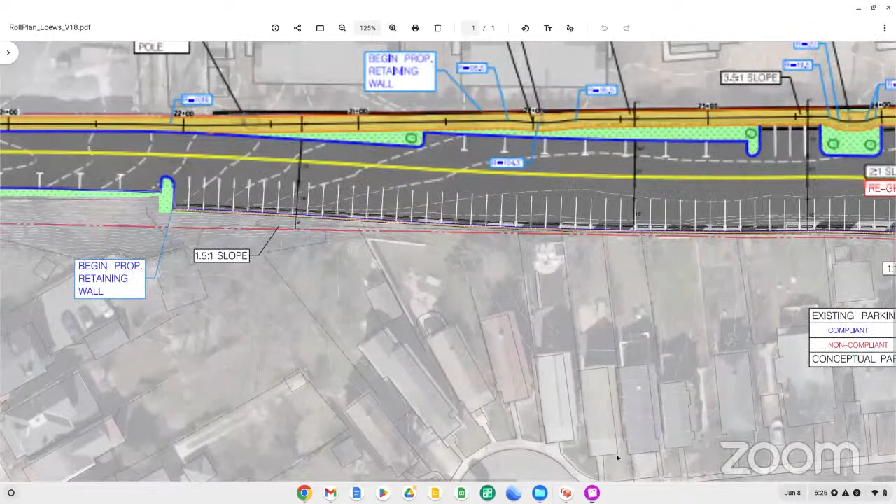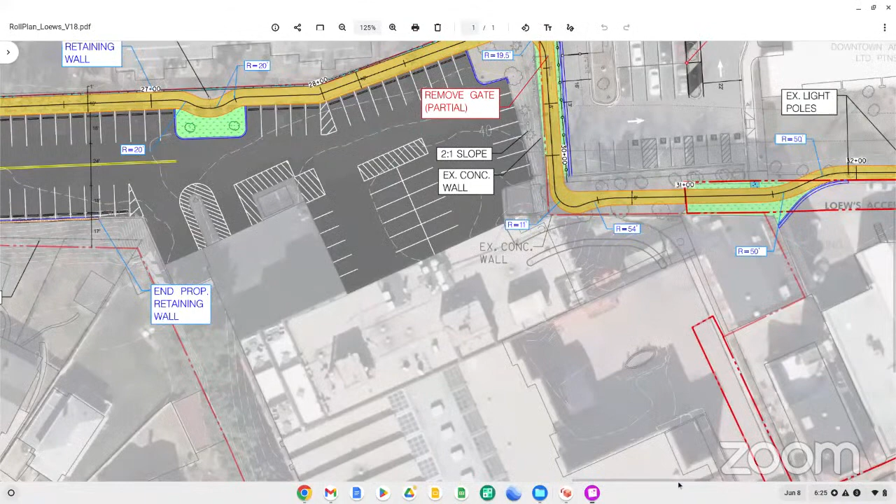Everyone, I am so sorry, this is Crystal, I have to cut out. My niece has a performance at Maryland Hall this evening, so I'm about to head out to partake in that event. Great, go enjoy yourself, thanks for coming, Crystal. Thank you, and thank you for inviting me, for including me. I'm really looking forward to see what we can do with this trail.

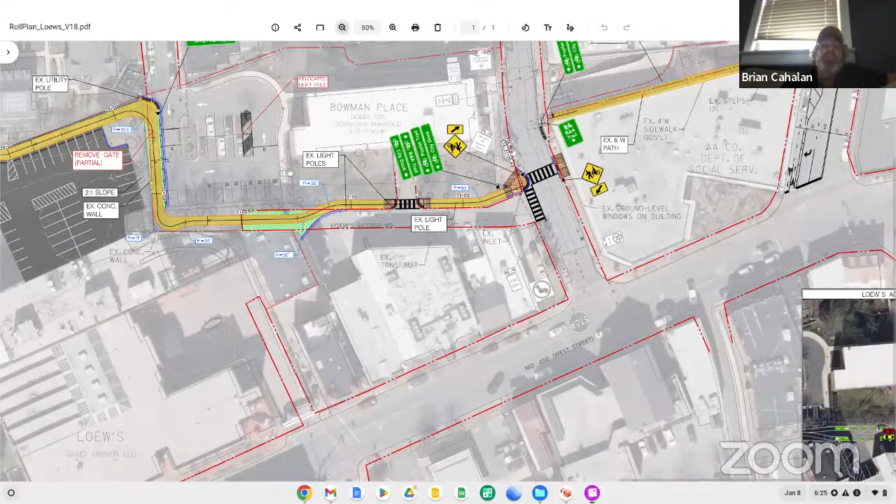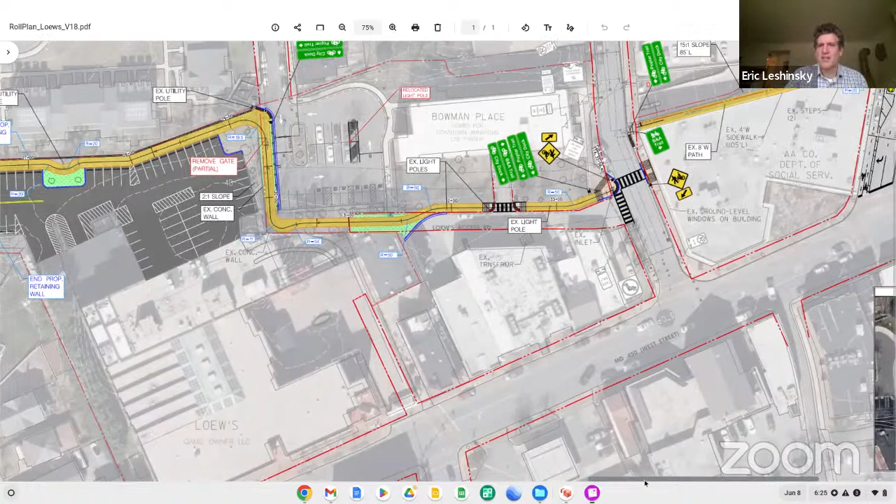This leg piece right here, Crystal, is right behind your house. Really? Yeah, that's Bowman Place right there. So here we are at West Street and West Washington. This is really where the trail starts in downtown, one end of it.

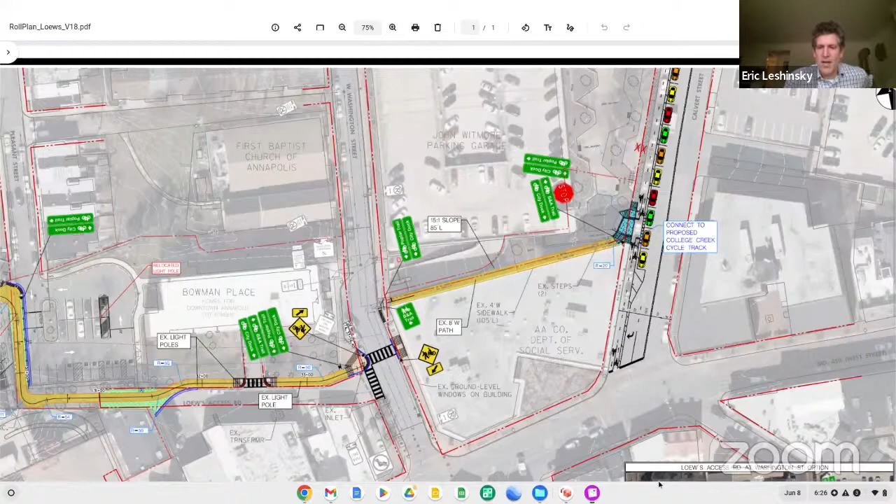Is that on the Loew's Access Road? Yeah, so it would come right through the wall that is right at the end of Pleasant Street. There's a chain link fence and a wall, and it's going to come right through there and then come alongside the Loew's, the Graduate Hotel service road. So it's going to be on the Graduate side, their parking lot, and we're going to have an access point at Pleasant Street.

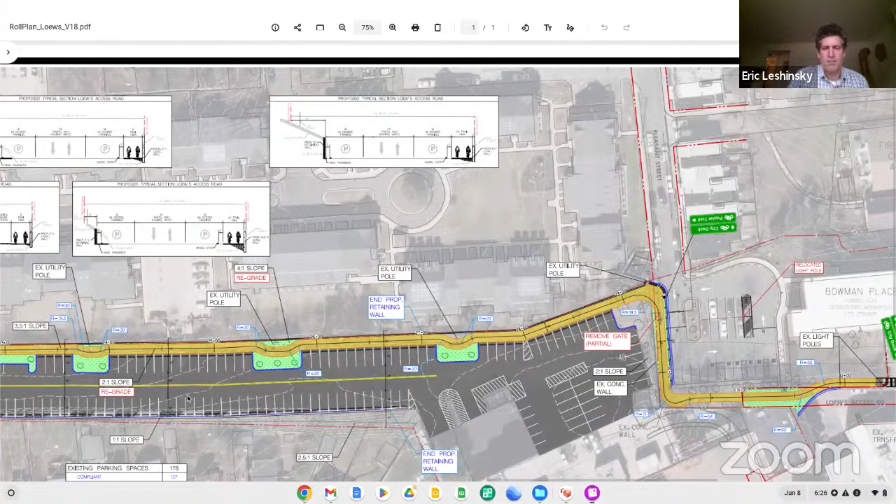I'm going to back up once you take off, Crystal, but just want to give you awareness. Rideout Street is another access point from the Clay Street community. So those will be direct access points to the trail, and then you could just jump on it, go out to this, all still on that service road.

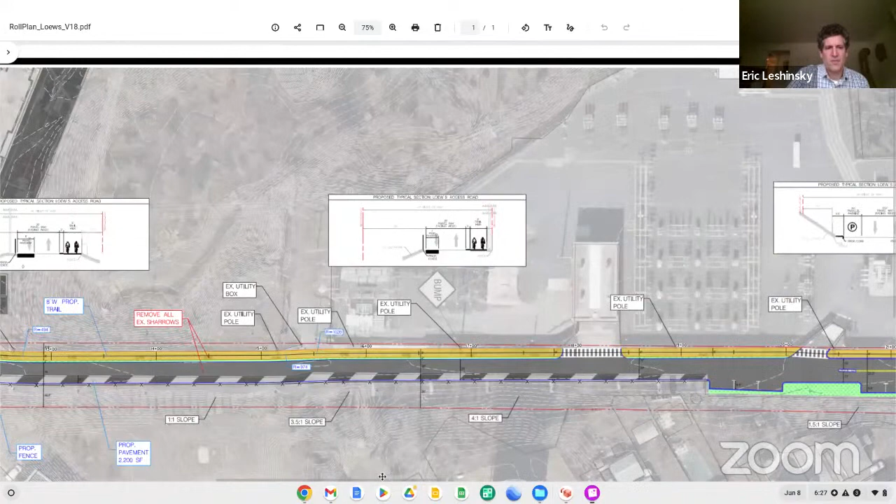To Taylor Avenue. Now we're trying to make this circle a reality. This was a planned traffic circle, it's part of this new hotel project that is coming, it's under construction right now. There's sort of an alternate design as well. It's complicated, but it's going to be a much safer crossing regardless. One design or another, it's not going to be what it is today.

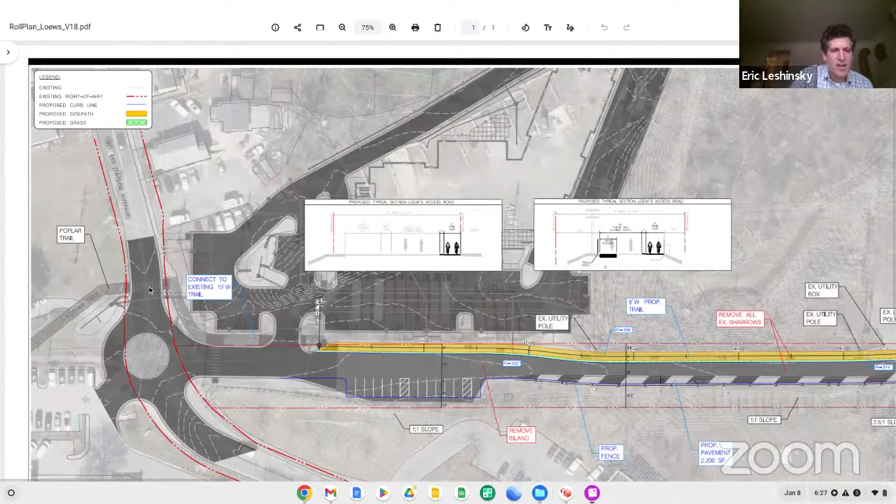And it's really privileging the trail crossing, which is being moved up. You can see it in gray pedestrian striping here. So that's the basic idea.

Thank you, I know you have to jump off, but this is going to be a great asset for your neighbors and you, definitely. It looks awesome from the plans. Yes, and then I'll...

Just for everyone's sake, some views of what we're talking about. So the end of Pleasant Street right now looks pretty bad, you have a parking lot, a wall and a chain link fence right here where my cursor is. That'll be opened up and that'll be a major entry point to the trail, with better lighting and landscape design. This is where the cyclist is, going along the Bowman Place Senior Apartments parking lot. This view in the upper left is coming from Pleasant Street down, starting into the Graduate's parking lot where the trail runs. So you get the idea.

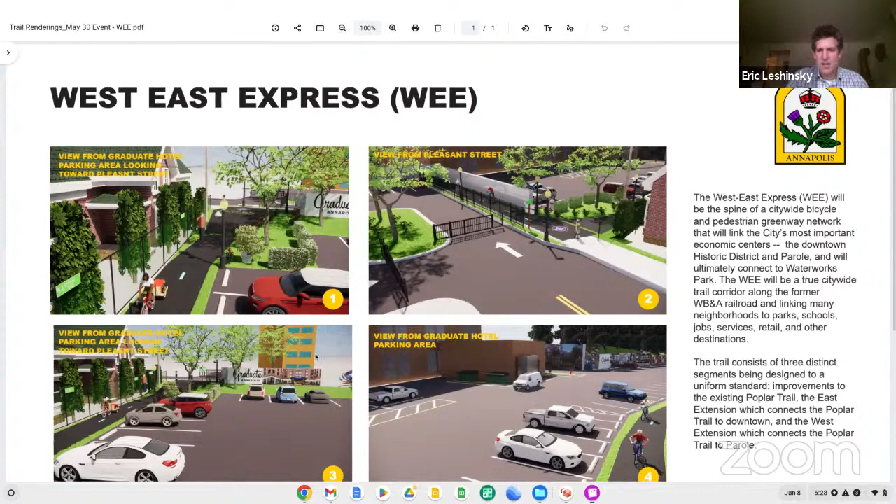All right, well, I'll talk to you guys later. Thank you for having me. You bet, we'll stay in touch.

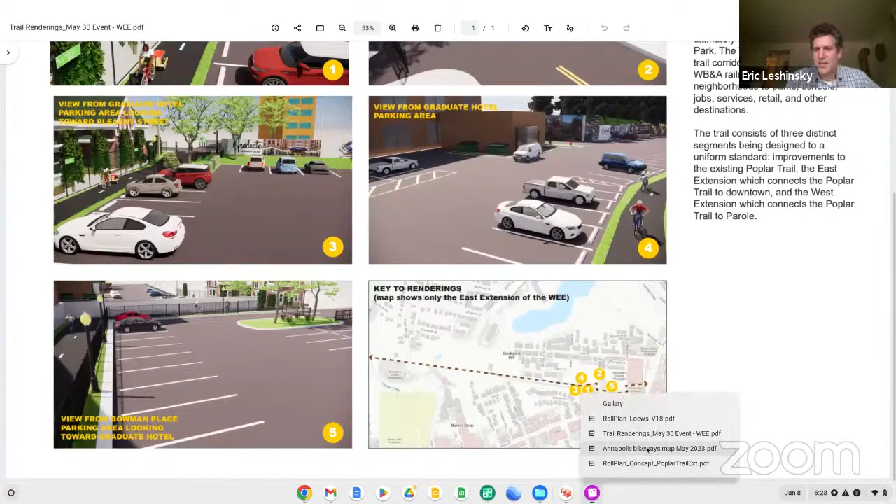So I'm going to go back. Let me talk about the beginning of the trail here, just so everybody's aware. We have the existing People's Park. Today there's sharrows on the sidewalk, a sort of brick-paved sidewalk with sharrows. We're going to be putting the trail into the street in a separated design from traffic, so the parked cars, the parallel parking, are going to be bumped out. Let me zoom in a little so you can see. Many of you are already familiar with this, so I just want to make sure everybody's on the same page.

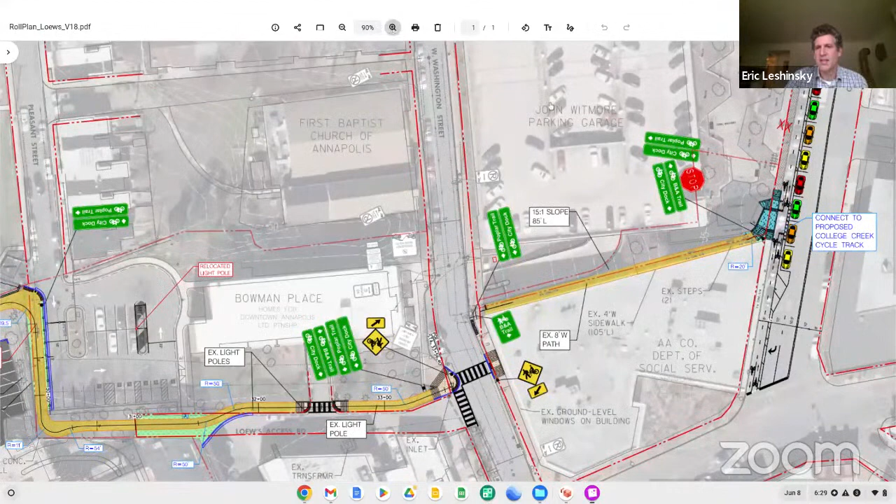So this is coming from like Rowe Boulevard, St. Anne Cemetery area. We have that College Creek Connector Trail connecting right into this, from under Rowe Boulevard. The idea looks a little complicated, but initially we just had this on-street protected cycle track connecting to this landing in blue here, and that's where you pick up, kind of a trailhead for the West East Express.

We sort of realized if you're coming from Church Circle on West Street or from Calvert Street right here, you're either going to go jump on the sidewalk or go against traffic, or you're going to go with traffic and then try to cut across mid-block.

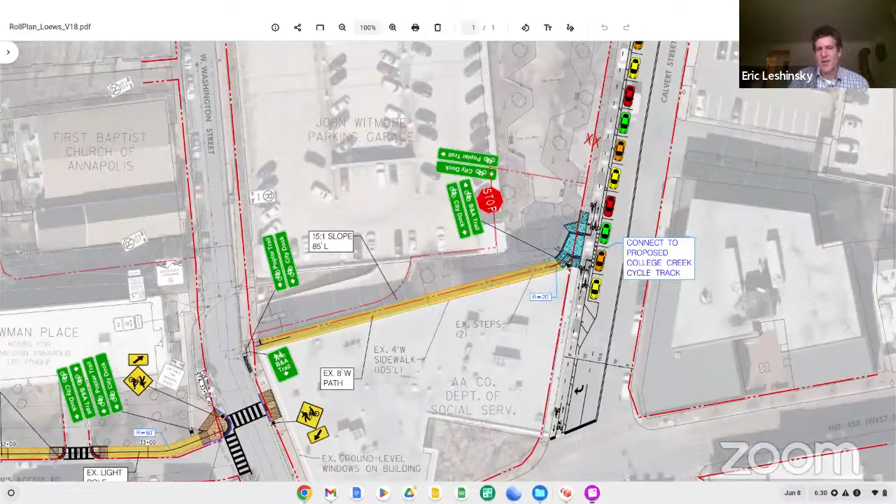So what we did was we extended that two-way cycle track all the way to the intersection. That's the idea. It's still going to be a little odd maybe for the oncoming drivers, but I think it'll be safe. We haven't fully finished the design. This is essentially a 30% design.

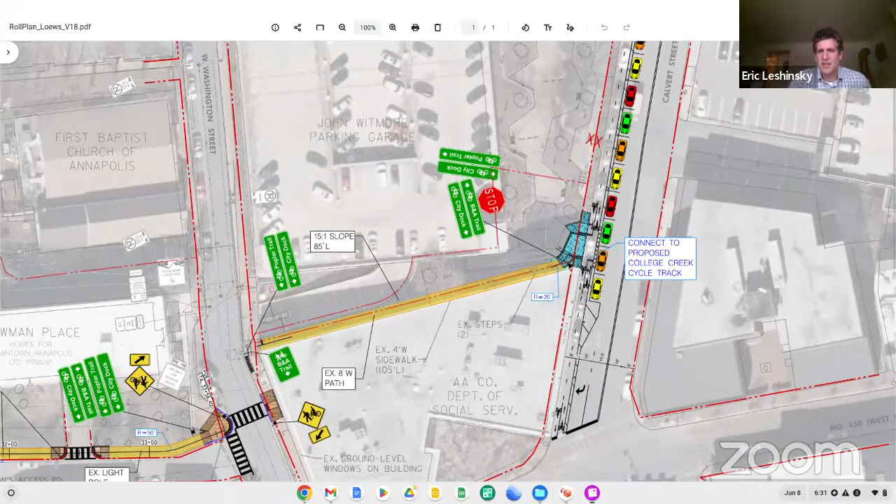This portion of the trail, but we just want comments throughout. And then you're coming alongside the garage here where there's an existing sidewalk, so that'll be kind of mostly just marked as a trail. I don't know that there's going to be a whole lot, I think we may be widening it a little, but I think it's mostly unchanged. You get to the intersection here, West Washington, where you have senior apartments across the street.

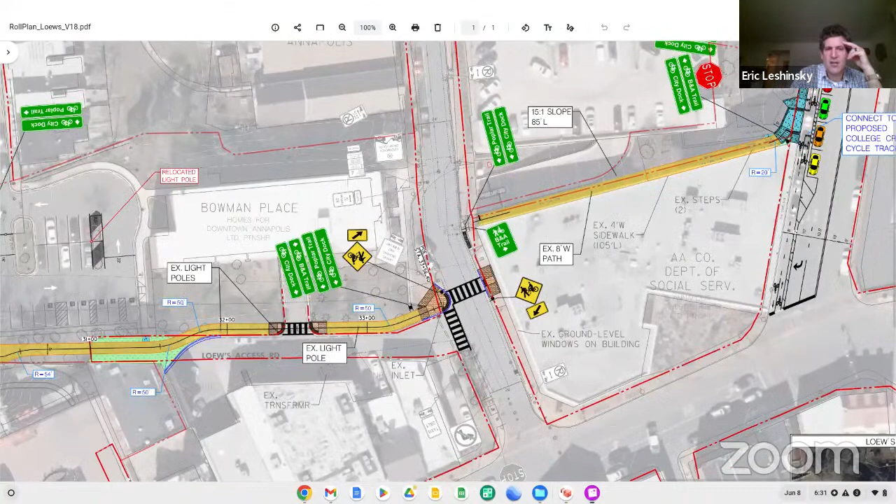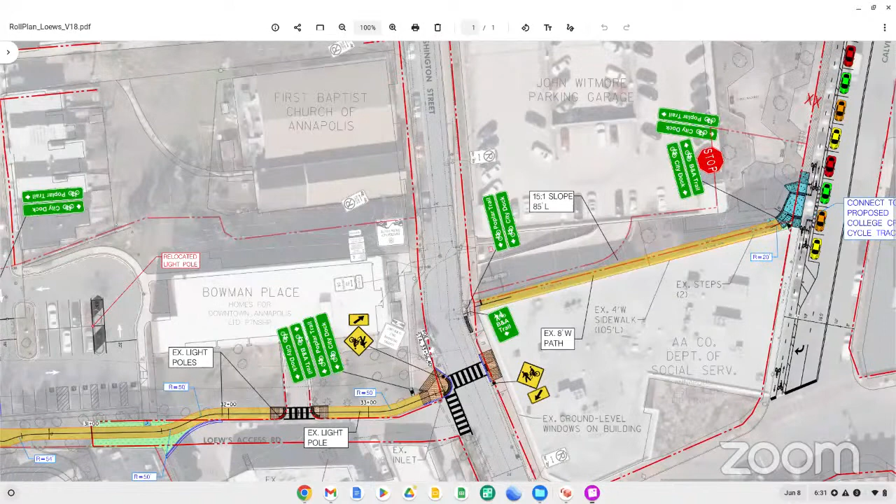Hey Eric, just quick, just back on - so if that cycle track goes all the way to West Street, somebody on a bike heading on it towards West Street that wants to turn left, the tricky thing is going to be how the signal works and how the turning movements work at that intersection for somebody on a bike.

That's a great point. I mean, I keep asking myself, where will Annapolis's first bike traffic signal be? This could be a candidate. We don't have anything like that yet, although a lot of places have them these days.

And again, that also will be an SHA thing, right? Yeah, right, it's SHA's down there too. Yep, so that's going to have to be in scope of the to-be-initiated SHA project. For those who might not be aware, SHA is the State Highway Administration. They own a large percentage of our major roadways in Annapolis, so we have to work with them on a lot of projects.

I will say that they're probably farther along than they've been before on bike and pedestrian mobility, but still, most of what they do is moving cars.

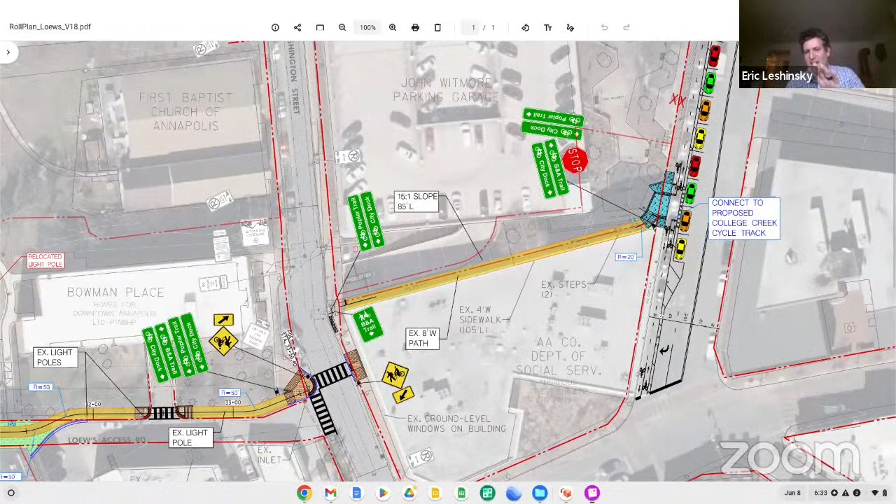So we have - can I ask a question? Yeah, for sure, I can't see you guys so please just butt in. This is Dan. So this just seems a little bit unnatural to me - that sidewalk that goes behind the garage is pretty narrow when it cuts behind the garage, and I walk or run there sometimes. So I imagine if there's bicycles going, there's not really enough room there for people to walk and ride bikes safely, or I'm not sure.

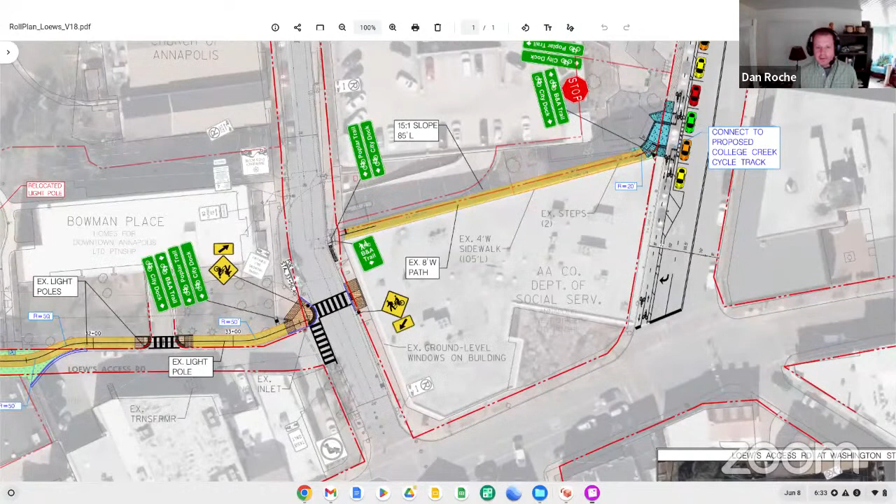And it just looking at the map, it seems more natural for people that are coming from all directions to maybe go that one block along West Street and then turn right and go up before joining the West East Express. Is the reason why you are not proposing that because having a one block long bike lane on West Street there would require some act of God with the SHA?

Basically, yeah. Can we acknowledge that that's probably what a lot of people are going to do? Yeah, I do a fair amount of acknowledging of that - for example, at West Washington, we wanted to have a diagonal crossing right here, but we got some pushback from our own city public works folks who tend to try to do things much more traditional way, I guess that's the best way to describe it.

And so we kind of admitted that if you're on a bike, you're probably just going to cut across. There'll be a good sign here and some wayfinding, but for pedestrians or people who are more cautious, they're going to take the crosswalk. But yeah, there is a segment of the population that's probably just going to enter on West Washington.

I think we were thinking from visitors to Annapolis' perspective, having an actual place at People's Park that could orient them and have some trail map signage. Maybe I'm not sure if there's actually something about the trail already there - it might be, but that was the idea. I get what you're saying.

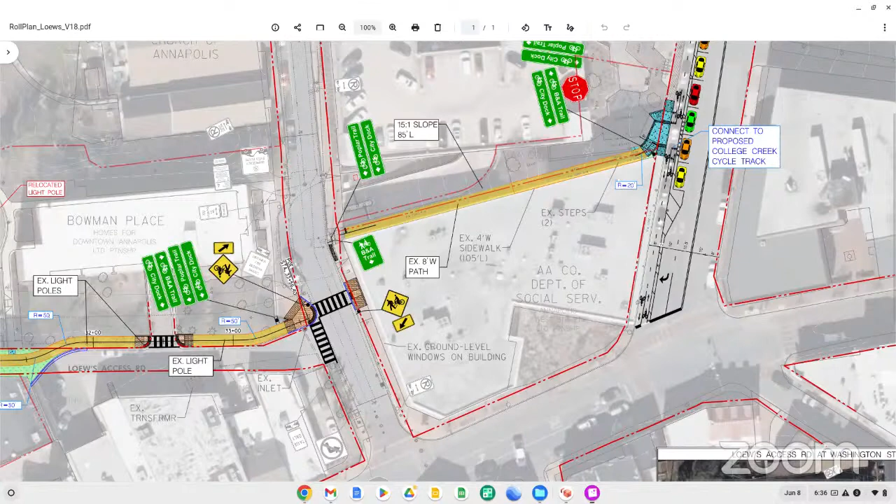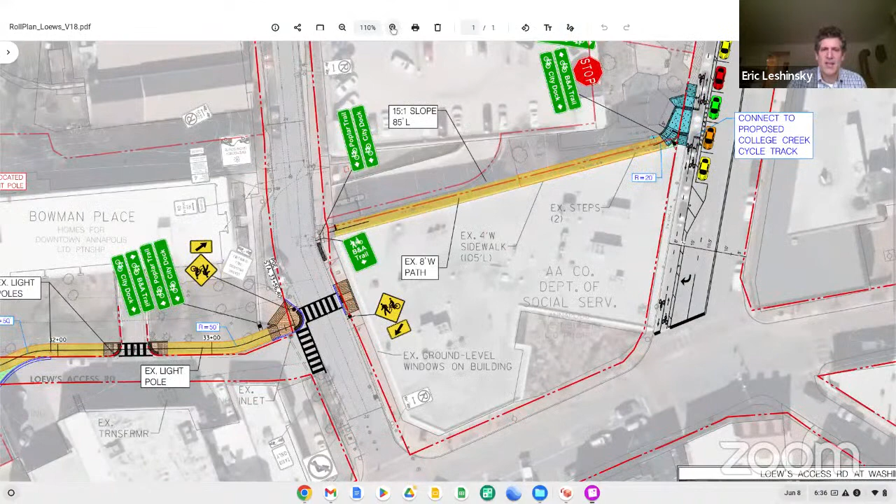We need to look, because I'm not sure what the exact width is. It is pretty tight.

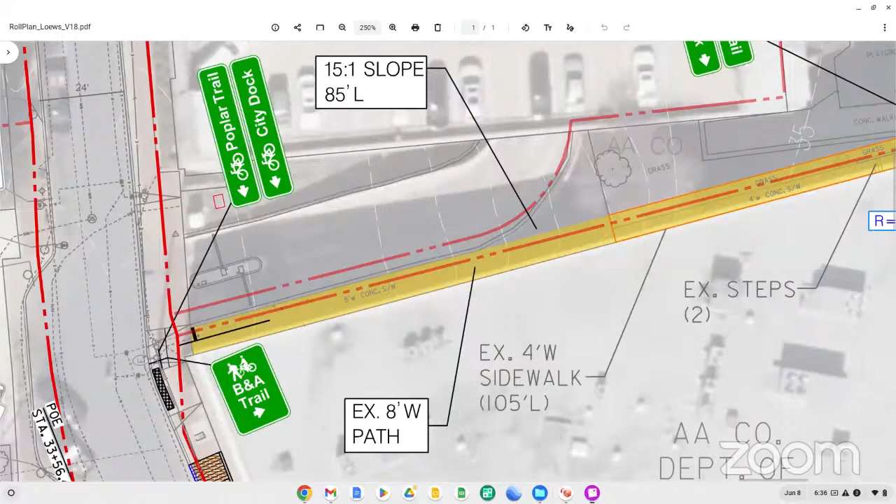This is Eric. When I looked at the bike trail, the only area that made me nervous was actually the area behind social service, especially where it exits onto Calvert Street, because there is zero visibility of the pedestrians on that sidewalk. That building comes right out to the sidewalk, so there kind of lacks some visibility there, which made me nervous of potential pedestrian bike collisions.

And there's also exit doors that are pretty popular with social services on the back side of the building, for those who smoke. They all go out that back area to stand and smoke under the tree. So if the door opens, it's going right into that sidewalk area, which could be a surprise for a cyclist going through there. Yeah, it's a great point. This could definitely use some redesign and thinking.

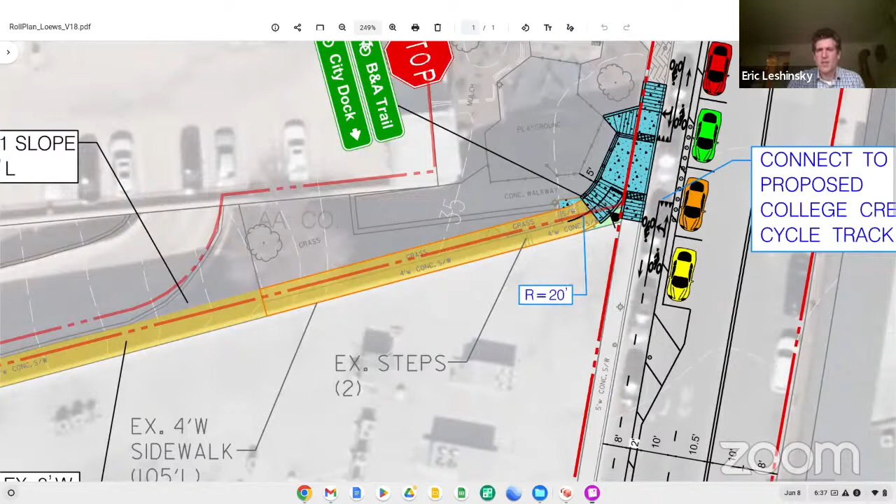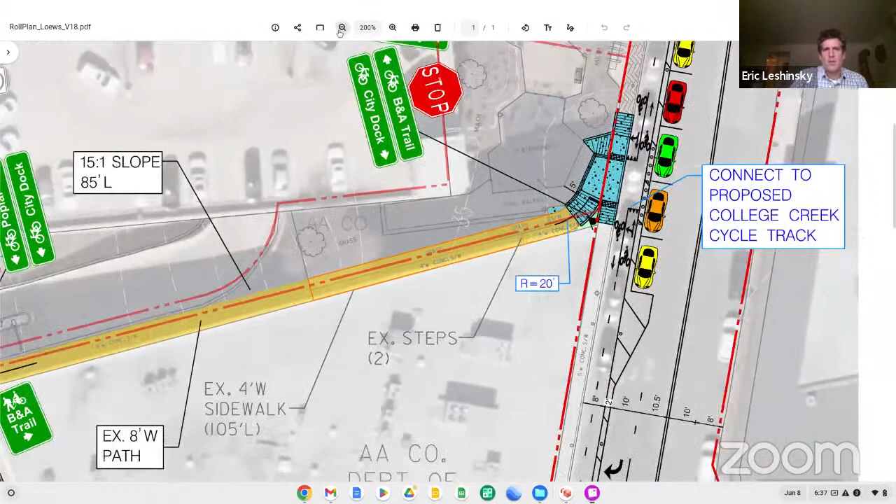What have you considered having it just go down Clay Street, like one block up? We have not, primarily because we were trying to mitigate conflict with anything else.

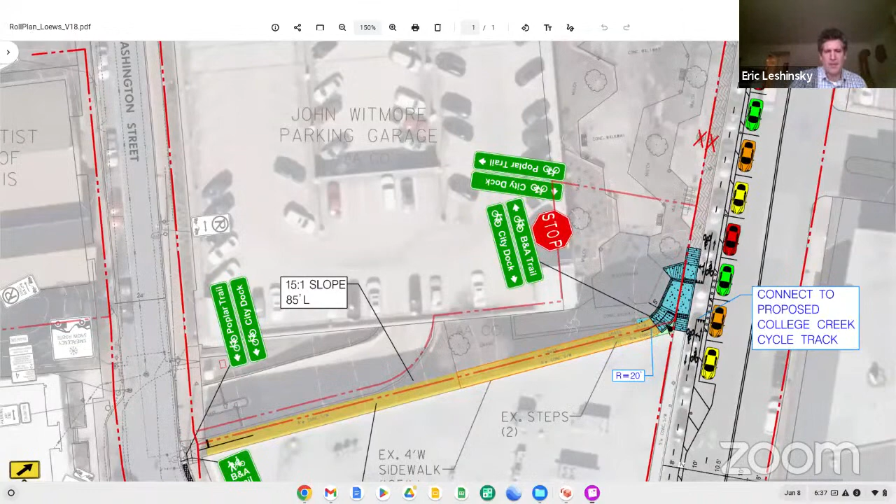I mean, Clay is narrow there too. Actually, that block may be a little wider, when I think about it. I could pull up the Google map. But that makes the left unpleasant. That kind of does make sense.

Yeah, I don't think that block of Clay Street is too tight, but I'm not a city planner, so we haven't looked at that.

I think that the directness of going through the park, and then obviously it jogs a little at West Washington, but we were trying to avoid the jogs too. I mean, that's also part of this, but...

Because that would also avoid the kind of awkward crossing of West Washington Street, because you would just be turning left at that. I think it's a 4-way stop at Washington and Clay.

But anyway, it's just something to think about if you end up running into a lot of headaches with that kind of narrow corridor between the parking lot ramp and the building there.

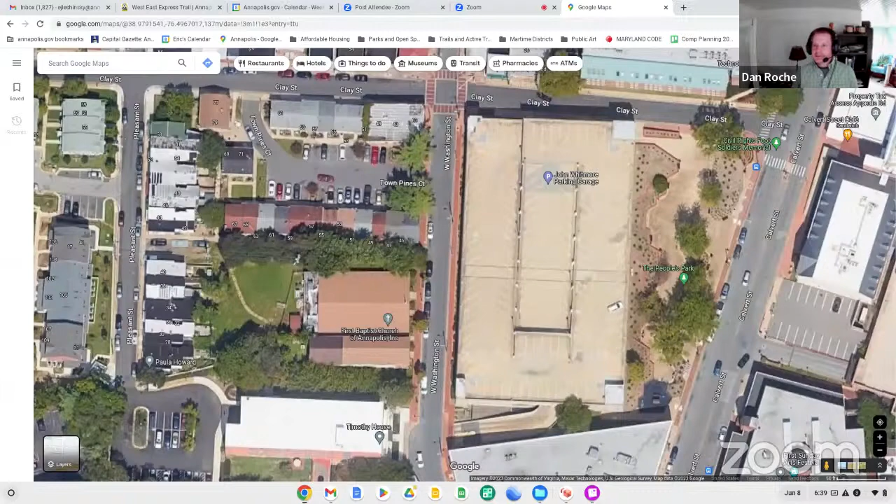Yeah, to me the important thing is not having to fight with the barriers around the Loews hotel, right? So I hope that the energy of the city can be spent making that happen, and also opening up the access to the Clay Street community like we were just talking about, without those horrible fences.

Rather than like this end of it, I feel like it's kind of not worth your energy to fight with getting something behind that parking garage when there's already other ways to get around there.

Yeah, so the only counterbalance here, there's a tension - the real goal is to keep this completely road separated, so shared use path, like going between the buildings, completely road separated. If we go over to Clay Street, if we can get cycle track where there's some vertical barrier between the vehicle travel lanes and this shared use path, that's okay. But it's a tension between what's feasible and trying to keep it as road separated as possible.

So I'm not... yeah, that's true. I should say that one of the big federal grants we got for this section is called Recreational Trails, and it's only for trails - you can only cover things that are not on the roadways. So we didn't know that when we started. We were designing it without that in mind originally, but that has reinforced not using streets. But I think that maybe...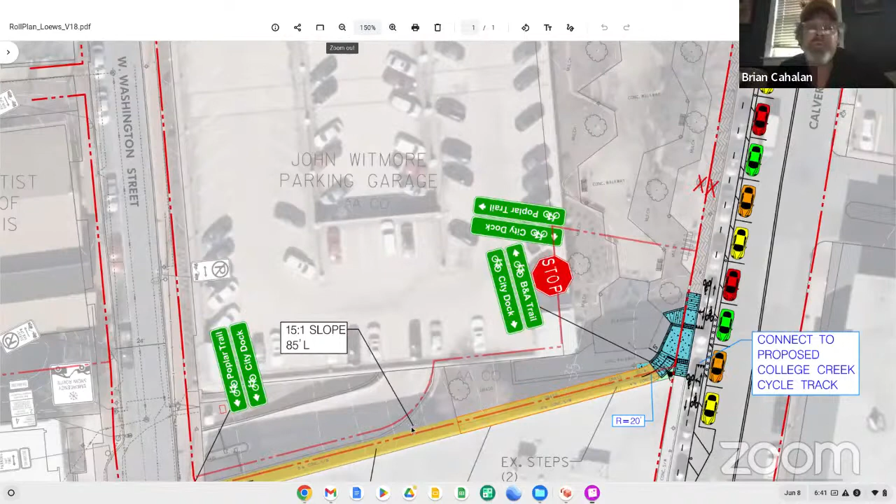We also, Eric, you and I had discussed - half of that can actually be wider. Up right until the over-ramp. Remember that? Yeah, I think we can make that happen, so it would really only then be about 30 feet.

Yeah, that's a good point. I'm guessing 30 feet, I have no idea, but it's close. Well, these are great comments.

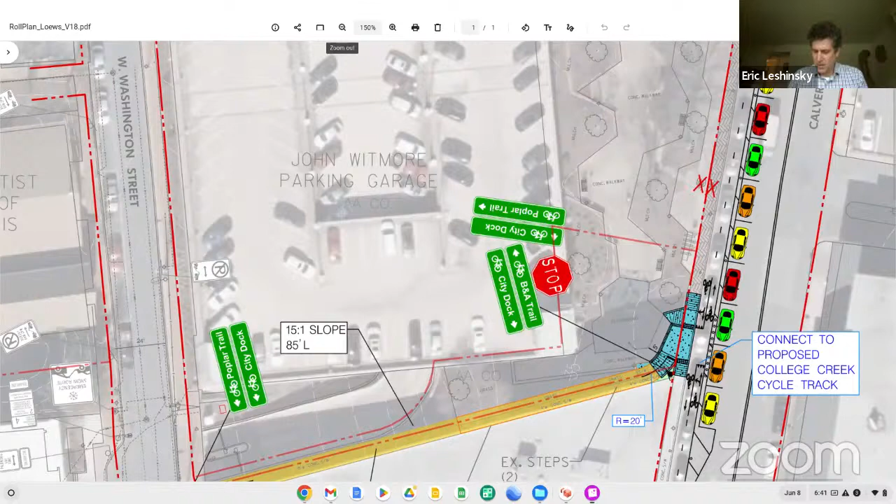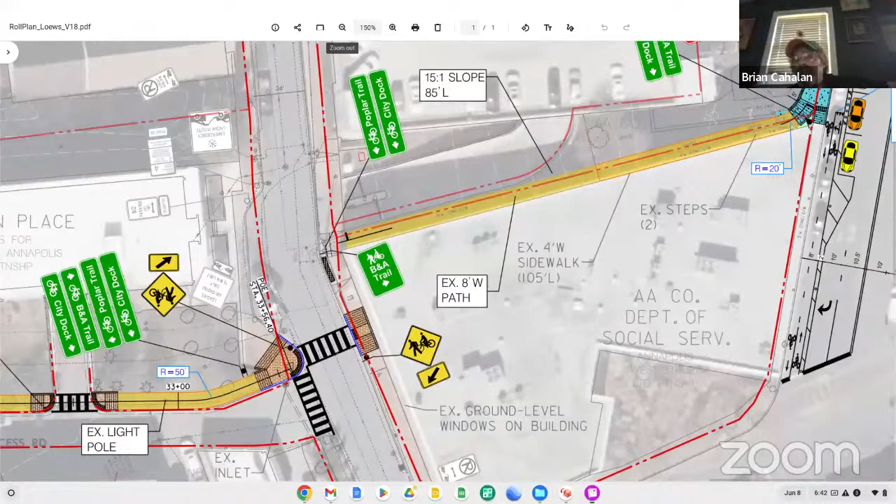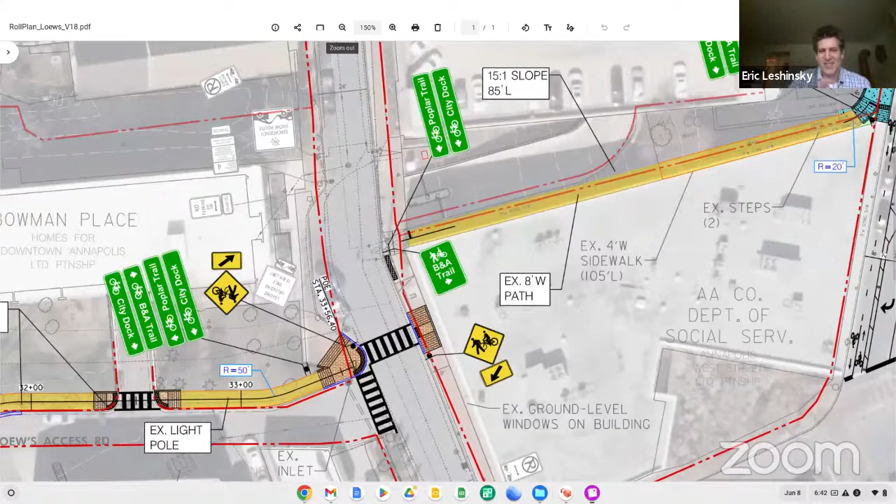You can only actually make it wider in the middle, Brian, because at the end you have the pedestrian path that comes out of the parking garage. That can be adjusted, we've looked at it, it can be done. There is no shortage of things being moved on these projects. At some point we had to say, all right, it is what it is. We have to move things, but we are trying to minimize that as much as possible.

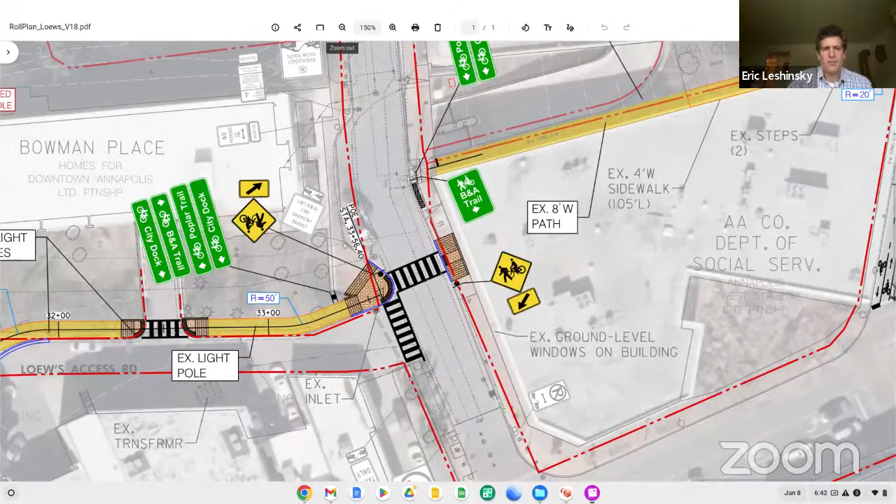So you're going one way there, crossing West Washington. There's a nice sort of new corner landing here, and then we're using part of Bowman Place, this is the mid-rise build, the senior apartments I mentioned. We're using a portion of their property, and we've been meeting with them. They're supportive of this project.

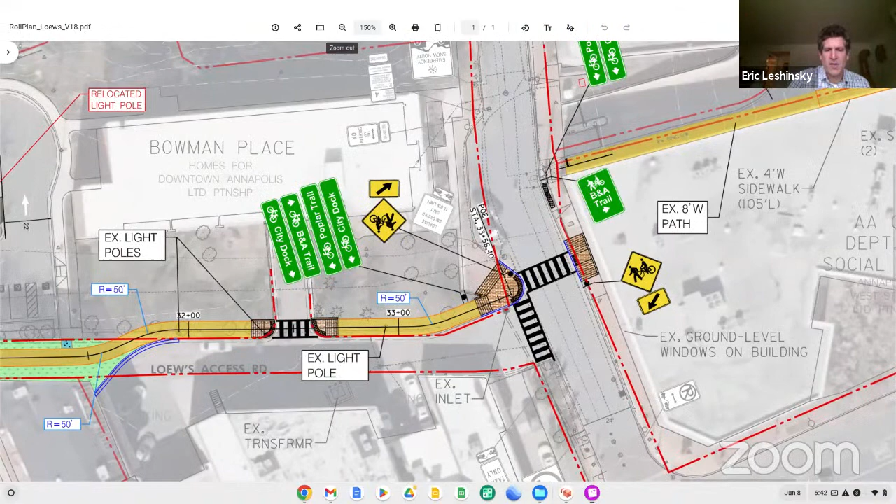We're going alongside this green area they have here, alongside the alley. It's actually still considered part of that Loew's access road. And they have kind of a planted area that was, I guess, put in when they did their parking lot. We're going through there. There's not a lot of impacts to trees, it's actually just mostly small shrubs that are not in great condition.

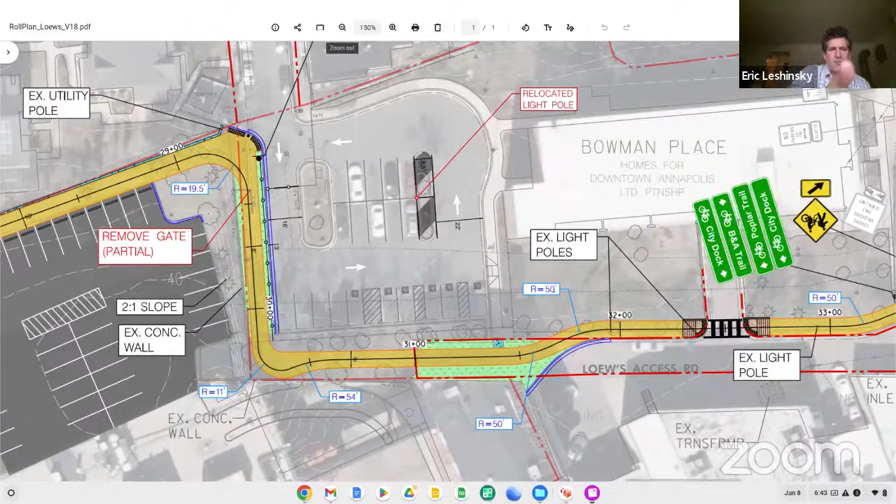Coming around, this is where that existing wall is at the Graduate Hotel, between there and the parking lot. We are doing some movements of curb in this parking lot, and we're putting up a fence. That's one of the compromises with Bowman Place. They have issues with security, that's kind of a line in the sand for them. They support this trail, but they really want it to be more controlled. They support the access point at Pleasant Street, but they really just want to encourage people to use that and not cut through their parking lot. So basically there would be a fence between the trail and the parking lot, and there's an existing fence that would stay right here. But Pleasant is really kind of a major entry point.

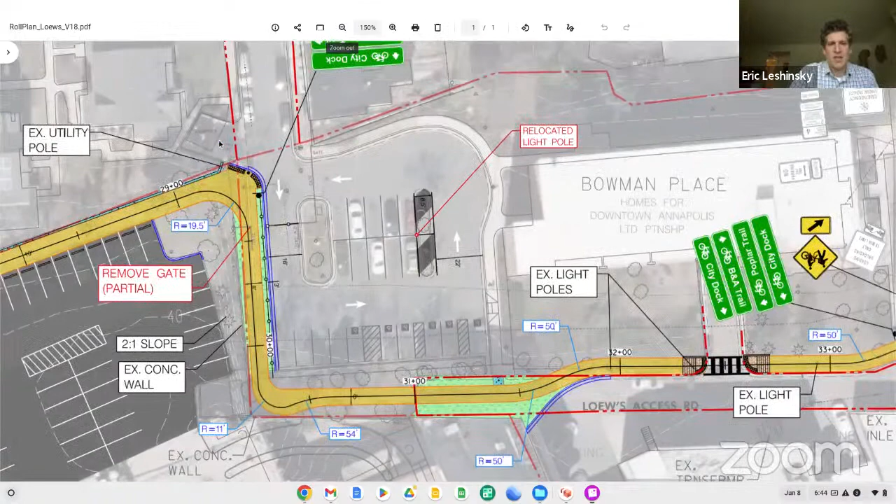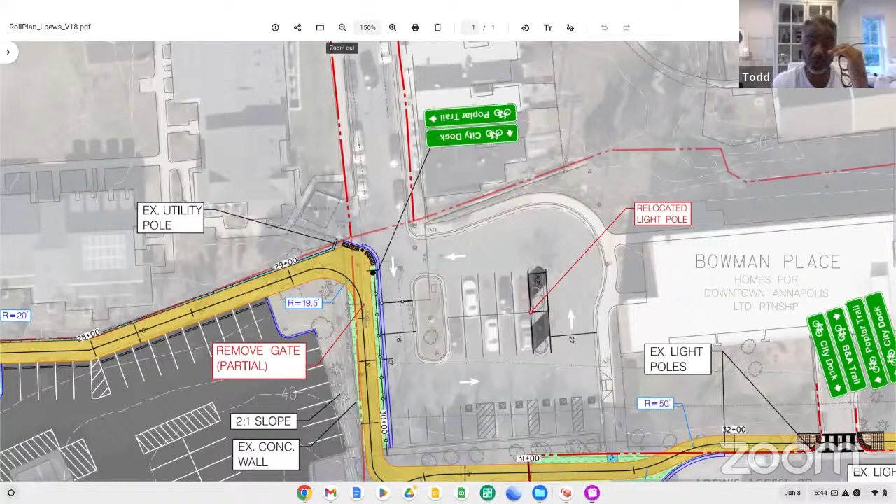Eric, this is Todd. Whose concern was that about? Was it the residents in Bowman Place, or was it from the company that manages and owns that? It's the management there at Bowman Place, the Homes for America company that developed that project and does the management there. So yeah, they've expressed that. In fact, they put a rolling gate in right here relatively recently that wasn't there before, and I think it's open most of the day actually, because it's a manual gate, I think.

So we get into these kinds of situations a fair amount. We have to just try to find some middle ground. But I think this one, for what it's worth, is a reasonable compromise, given that Pleasant Street is going to be the access point there.

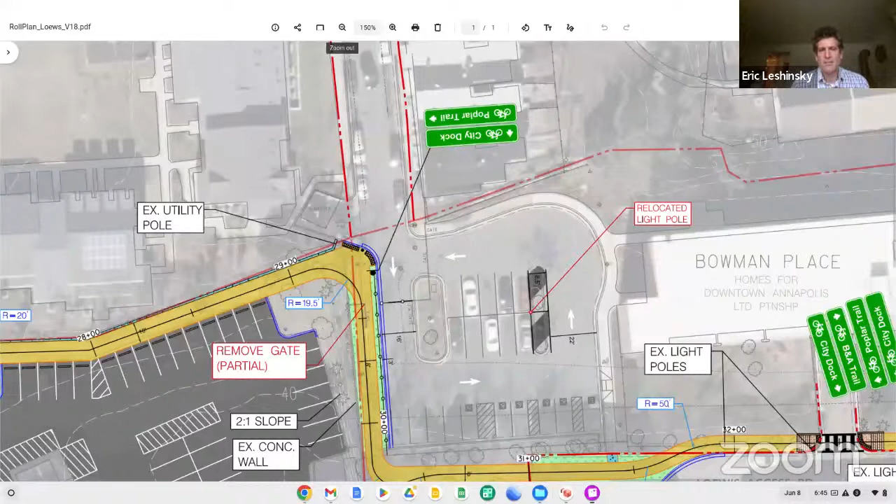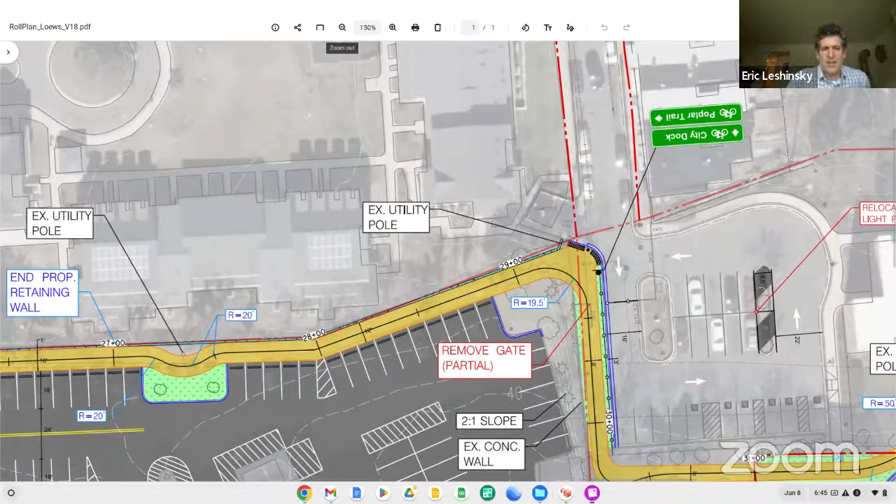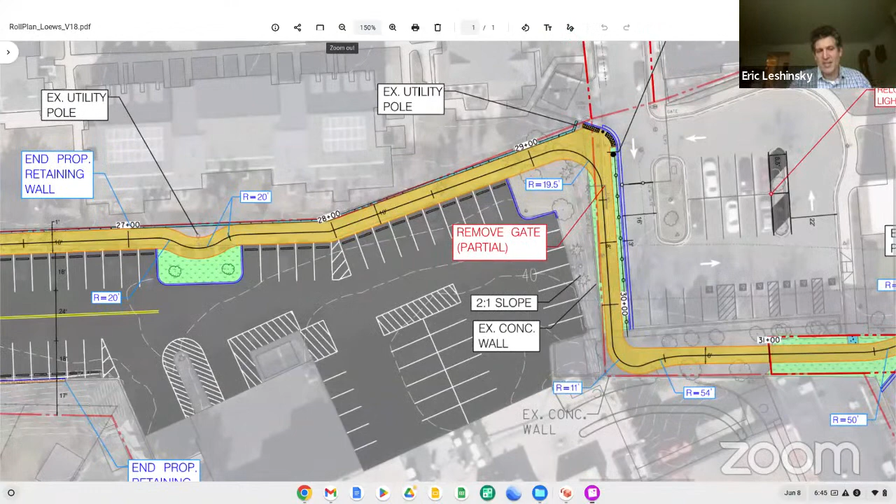It's pretty straightforward once you get into the Graduate Hotel's parking lot. What we did was we moved a lot of the parking lines to rebalance. The Graduate didn't want to lose any parking, so they did have a lot of parking spaces that weren't up to code. By restriping, we brought a lot of parking spaces up to current standard, and I think they're only losing maybe 6 spaces overall, which is pretty remarkable given that we're taking essentially 10 feet wide.

Then there's 2 feet between the parking block and the trail in general right here. We have these bump-outs where there are existing utility poles, power lines going down this corridor, and lights. So we did these bump-outs to try to avoid those. Those are probably the most expensive things to move, so that's just kind of a workaround.

There's currently a fence between Obery Court community and the parking lot. We are replacing that with a wall, and I'll tell you why. There's two reasons: one, we've heard complaints that residents get headlights into their homes from the parking lot, and that's from the Obery Court side. Then the Graduate has their security concerns, and that was another request. So it's a wall that I think will actually make good neighbors, I guess. It will have a mural probably on one or both sides, and has potential to be utilized in some way for that.

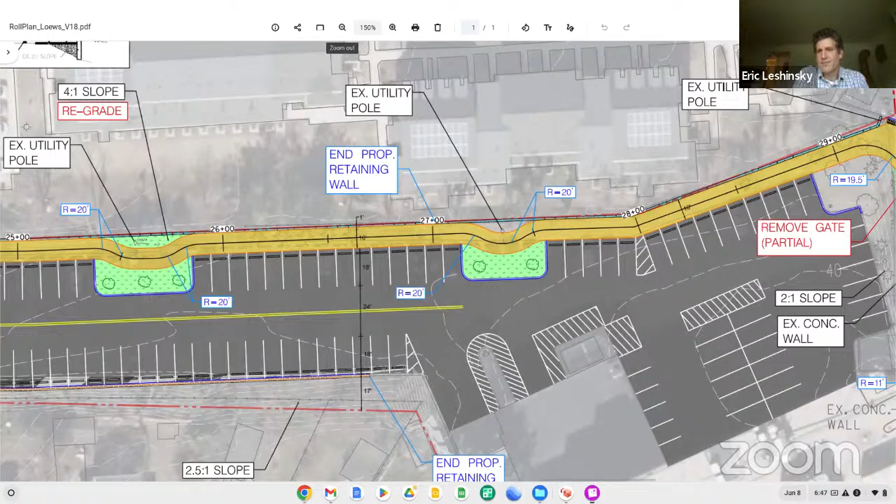That's currently in the design. You can see, let's see here, there's a section drawn, a kind of win-win because the neighbors get more privacy and the Loews gets the security concerns they had satisfied.

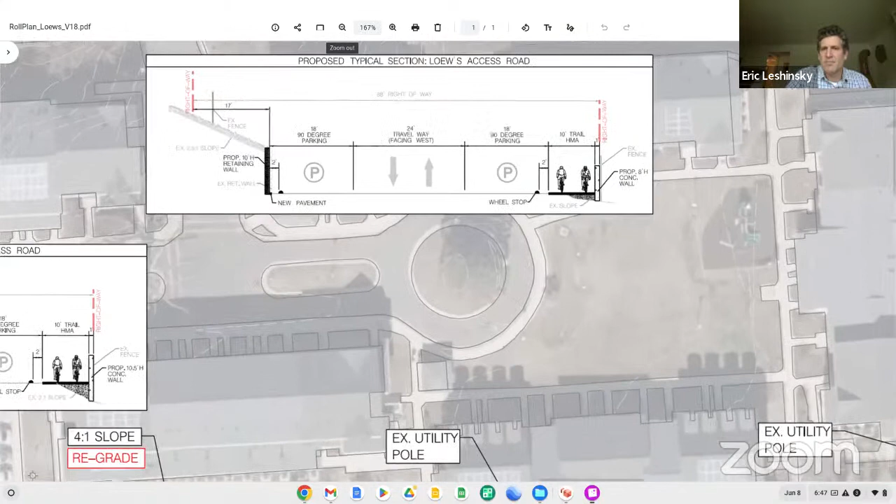This is a cross section. This is the wall, it's just about 6 feet above the grade. It's just a block wall, we have stucco probably, and then the trail, and then the parking here.

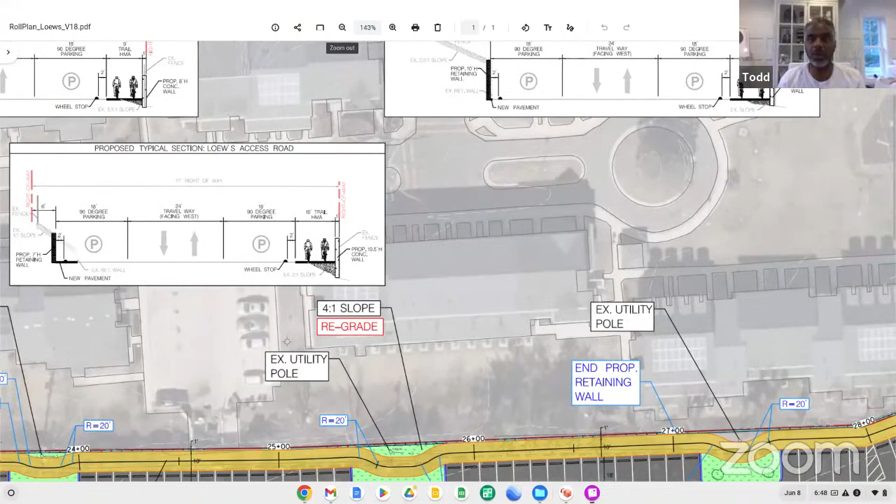So it won't be an East West Germany type wall. Say that again. It won't be an East Germany, West Germany type wall. No, no, it won't be that. It won't have a checkpoint. It has these dedicated access points.

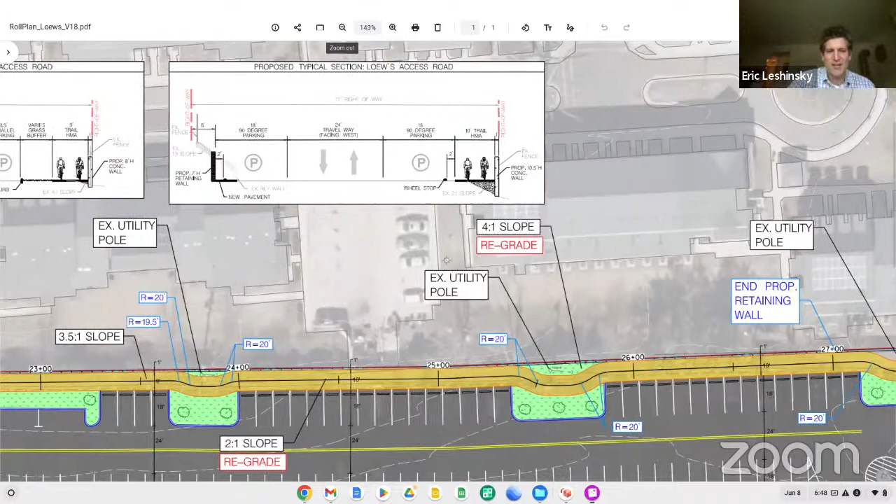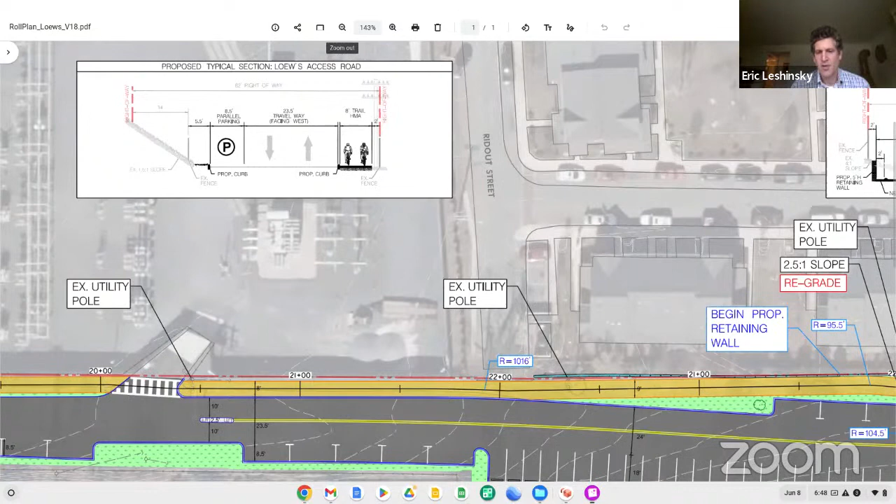You have Pleasant Street and you have Ridout Street. If I keep going down, this is the BG&E substation right next to Oberry Court, and this is Ridout Street. It currently dead ends at a fence to the parking lot, and it's not really easy to see here, but there would be an opening, about 10 foot or so, for a trail connection, and it will be marked.

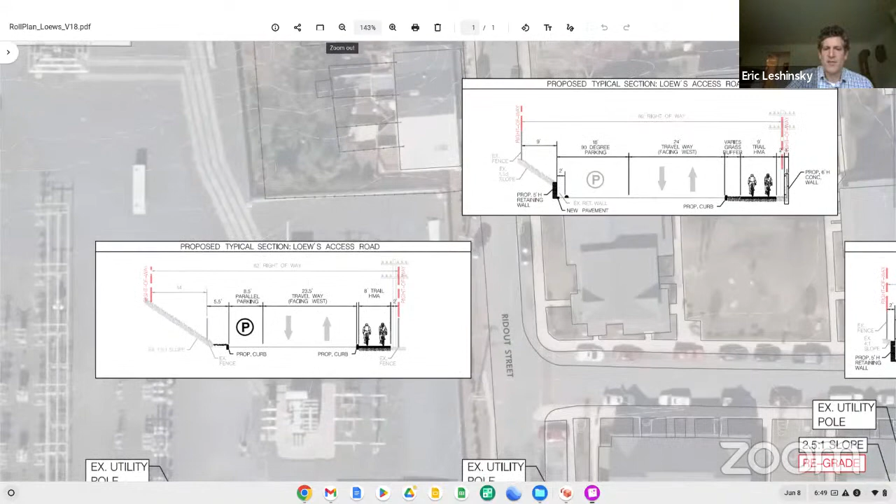And then just one block up is Robert Eads Park. It's off the map, but Ridout goes right up to Clay, just off the screen here. Just to the left of that would be the waterfront park project we're doing on College Creek, which is probably going to break ground in August. So that's another value in having Ridout become a more important connection.

One of the ways we were able to gain the space we need on the south side of the Loews Hotel parking lot, we were able to reclaim some land that was outside of an existing fence line, but still usable. So everything in this black and white striped area, that's all reclaimed.

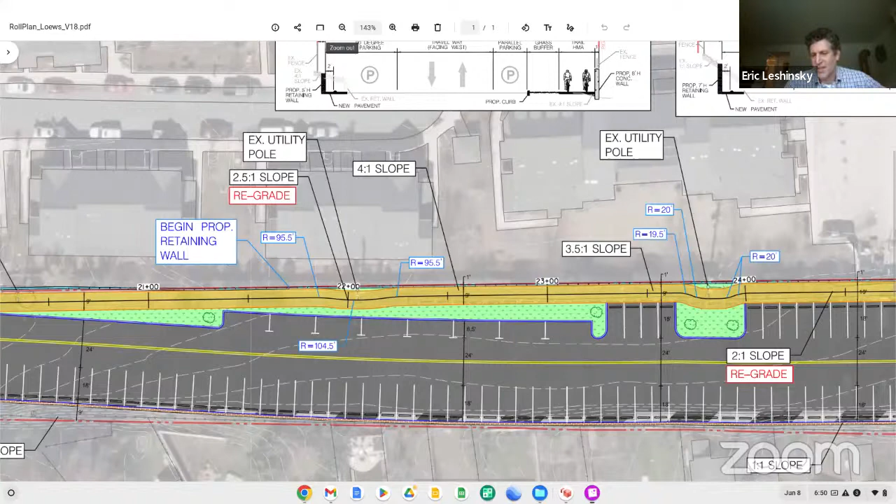That's all new paved area that we're reclaiming, and we're rebuilding a retaining wall here. That allowed us to move everything south to squeeze the trail in. It's not really squeezing, I mean it's sized, it's 10 foot.

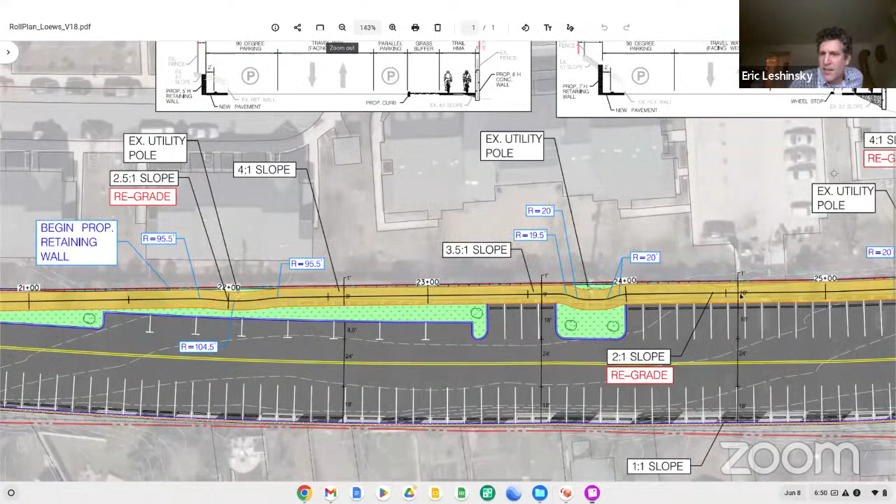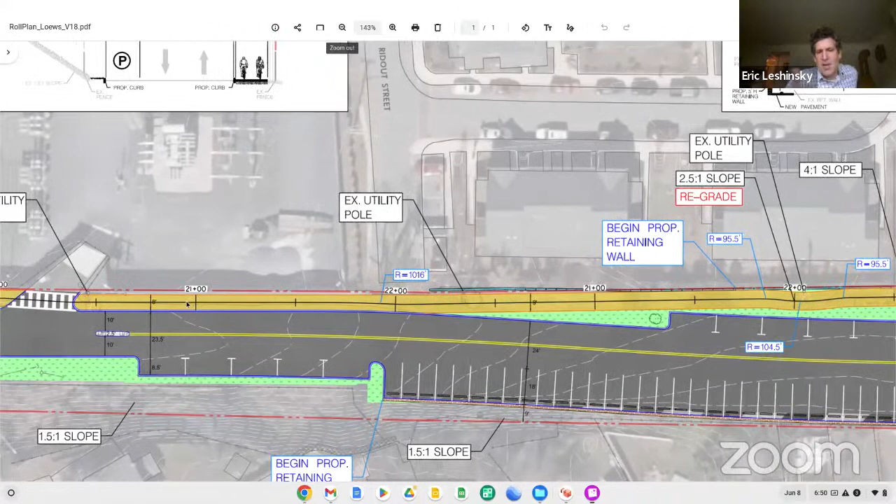It drops down to 9 foot here. I think it's 10 here, and then it's 9 here, and stays at 9. It pinches down to 8 right here. 8 is really the minimum for designing the two-way trail.

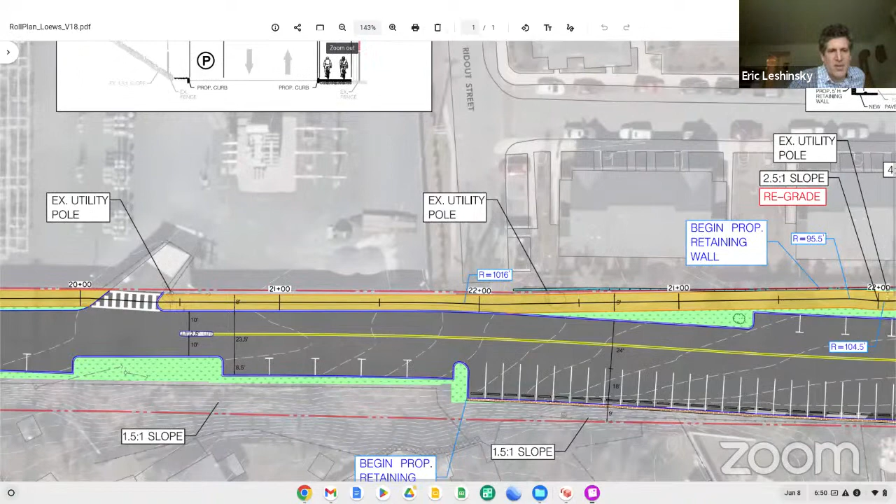It's wider than most of our other trails today, but I think he was going to try to make it 10 the whole way. Yeah, you're right. Because then we have all that space, or some more space on the other side.

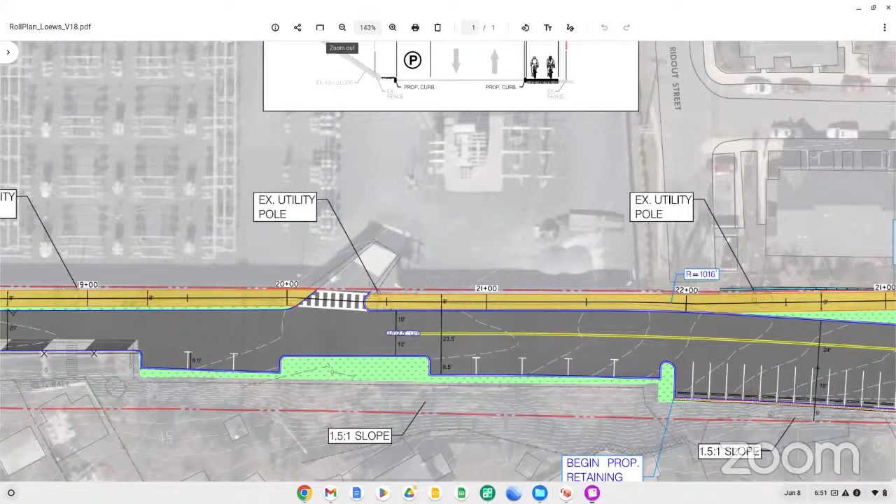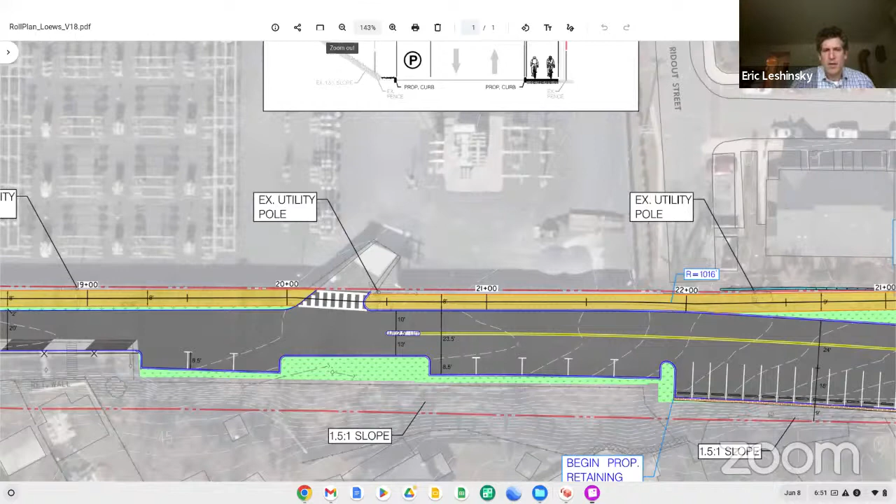Eric, you probably have this, but at the entrance to the trail at Ridout, you'll want some treatment that's safe and comfortable for bikes and peds, but will keep vehicles from passing through there. So people will use it as a cut through. Otherwise, we have that happen up at -- we definitely need a bollard or something. Yeah, bollard, yep.

Okay, I see we're already 10 minutes to 7. So we probably set expectations too high that we'd get through all the sections. But I think this is really more straightforward up until you get to Taylor.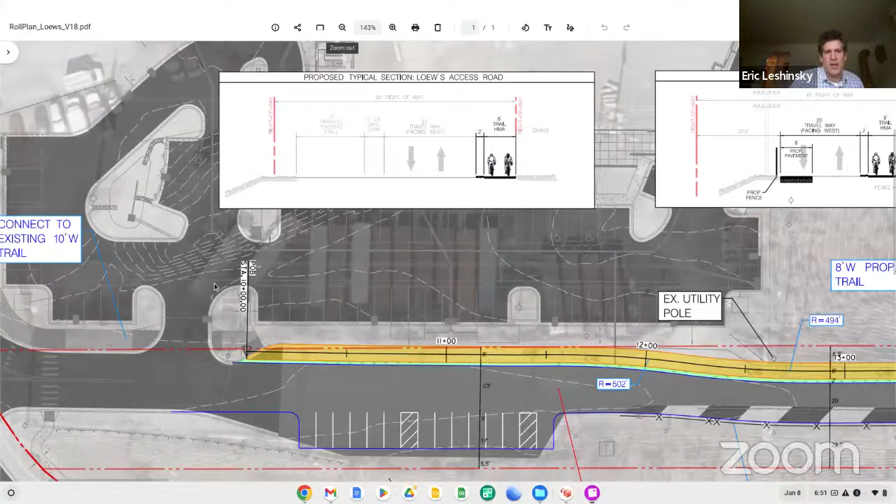And this is where we pick up with a trail segment that's being provided by this hotel project as part of their agreement with the city. You do have to cross this access way here, but then you're coming up and crossing in a place that's going to be far more visible to drivers than what we have today.

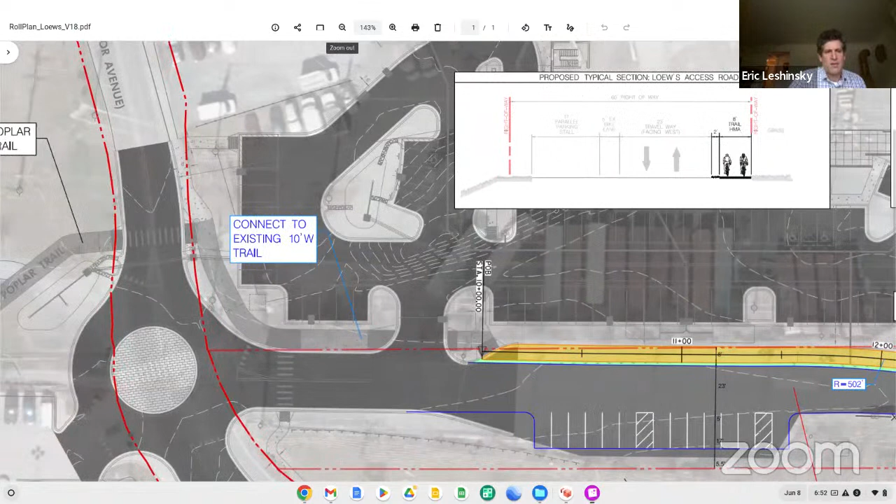This has actually been recently put in, this paved spur of the trail. What we used to use was coming alongside the parking area right here. That's still there, but we're going to probably be closing that off and just using this. So that's the segment.